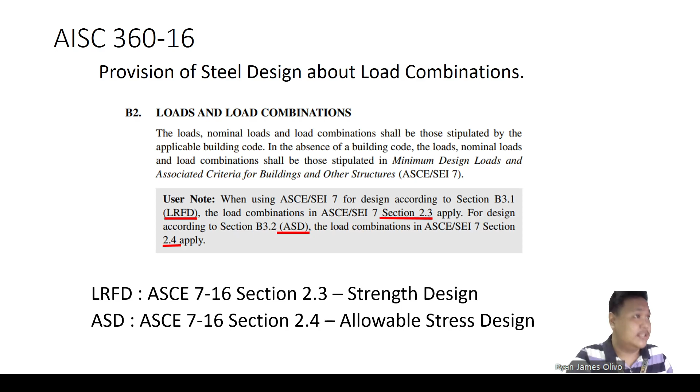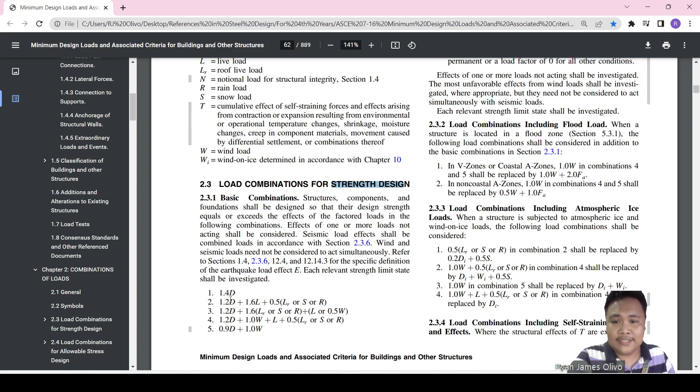So this is what I'm talking about, guys. As you can see, there's no such thing as for steel or for concrete, but this is what we call the load combinations for strength design, and that is 2.3. So for strength design, that is LRFD. As you can see, you're very familiar with this load combination, and for load combination for allowable stress design, this is for ASD.

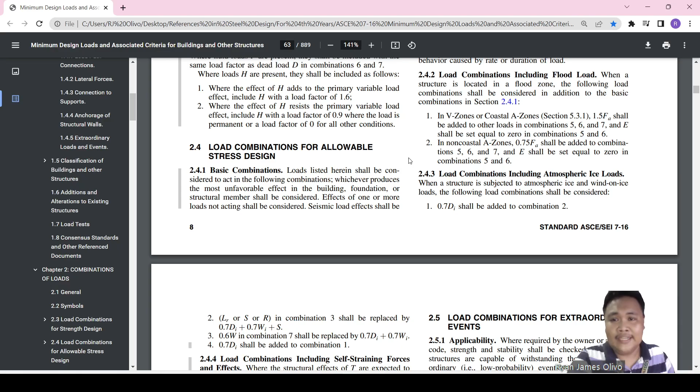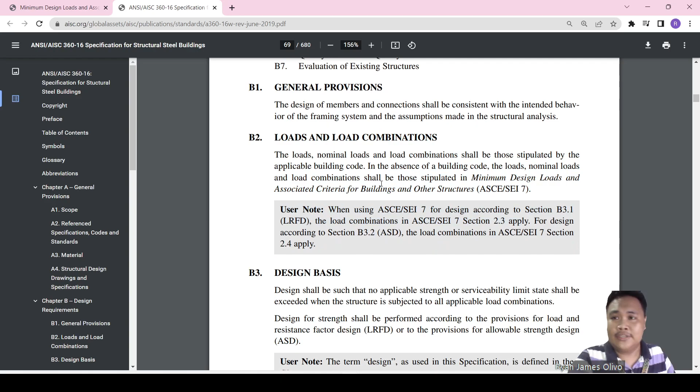Okay, so anyway, this is the specification — this is the load and load combinations. This is AISC, specifications for structural buildings. Let's go back, as you can see here. This is what I'm talking about, guys.

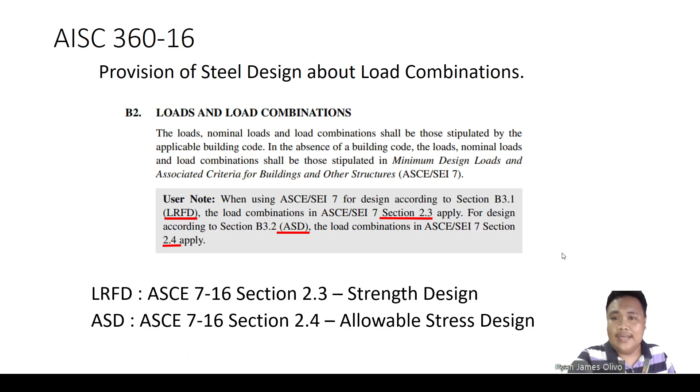As you can see here in section 2.3 and 2.4, both LRFD and ASD say that for wind loading, the most unfavorable effects from wind loads shall be investigated. That is why, as you have seen earlier from the videos, we consider many load cases — almost 8 load cases — because it is from the provision of ASCE, section 2.3 and 2.4, that the most unfavorable effects from wind load must be investigated. So any load combinations and any load cases, we must investigate.

And as you can see, you will never find a load combination that is both wind and earthquake. As you can see here, they need not be considered to act simultaneously with seismic load. So that is the only load combination where you cannot find both wind and earthquake, because it does not really make sense that a typhoon and an earthquake would simultaneously occur on this planet. But we don't know the future — that's the logic behind 'need not be considered to act simultaneously.' Anyway, snow loads and flood loads can act simultaneously with wind.

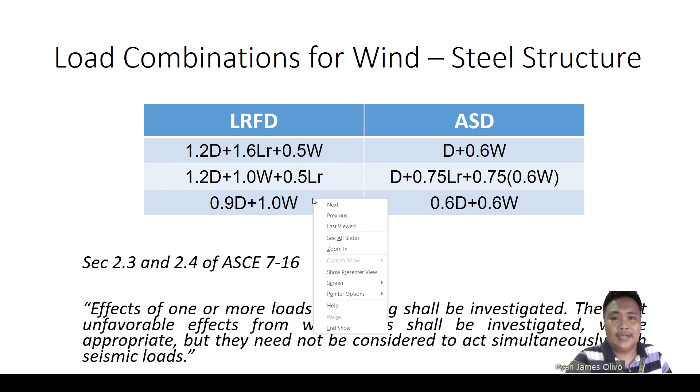And also, snow loads may also act simultaneously with earthquake. Obviously, live load and dead load will also act simultaneously with wind. So in this load combination, I only consider the LR for the roof live load, because in our ETABS example, our live load only comes from the roof. So anyway, let's go here.

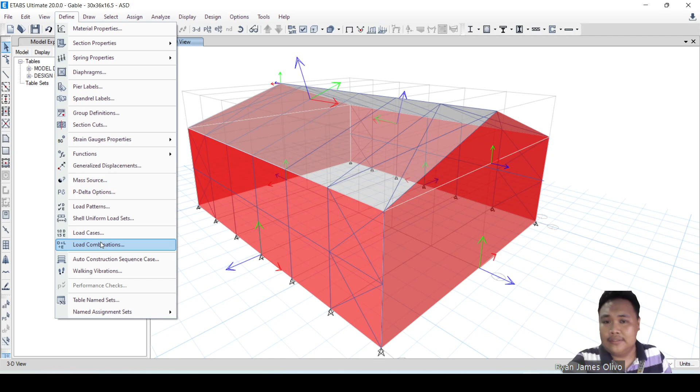So let's try doing load combinations for wind loading. First, let's define the load combination. So this is our load cases — we don't need to double check that because we've already checked it. So load pattern, let's try load combinations. We have shell uniform load sets too, but anyway, let's go to load combination. First, add new combo.

This is LRFD: 1.2D plus 1.6LR plus 0.5 wind. Okay, so let's put some dead load, then live load, then finally... this gives us 8 cases. So it's so many.

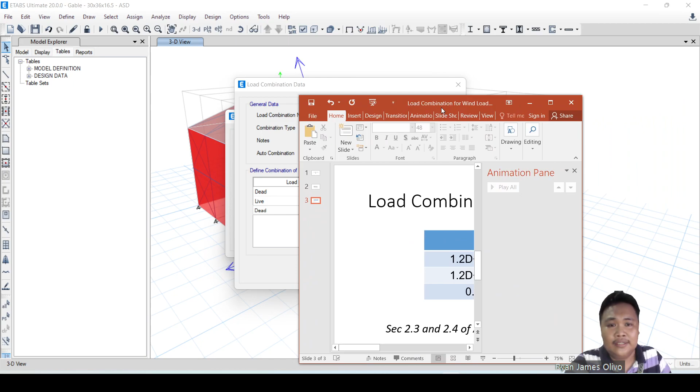So let's try. For the first load combination, this one, you can see here. So next load combination, this one. Anyway, it's so easy, no? So 1.2, 1.2, then this is load combination class, 1.6. And finally for the wind load, let's say WN1.

So let's try putting WN1 plus. Do not use this class without plus, because there's no internal pressure there — use this one instead. So okay, that is for our wind.

Then add new copy, so let's change it to WN1 minus. Okay. Then next, add copy of combo — WN underscore 2, then plus, so WN2 plus. Okay, add copy of new combo, minus — so just change the load name here to WN2 minus.

Then next, add new combo — sorry, let's copy this one. Add copy of combo: WP underscore 1 plus. So you can try to skip this part, you can forward this video, but I'll be doing this one. Okay, so WP1, okay.

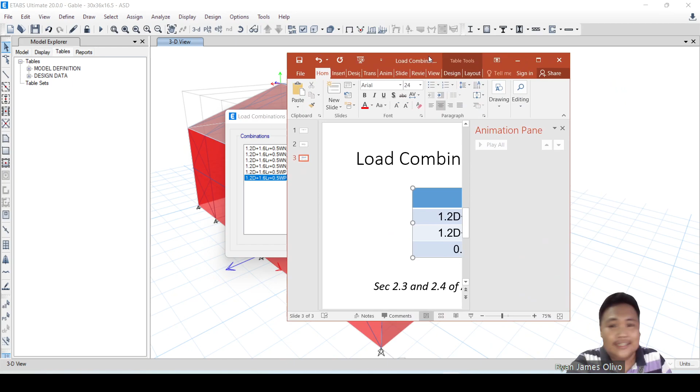Add a copy of combo WP1 minus, this is the negative WP1 minus, okay. The next, so we have so many load cases. Anyway, let's try because this is what's been said - don't forget about section 2.3, the most unfavorable effect. So we try all the scenarios.

So next we copy this one. So number 2. We're now on 2 plus, then it's not really hard because you can just try to check this one minus, minus. Okay, then.

1.0 wind. So this is just 0.5 wind, no? Oh sorry, I forgot, it's 0.5. So almost okay, it's 0.5. I did not see it. So 0.5, okay. 0.5. So double check your combinations class and your factor for this load.

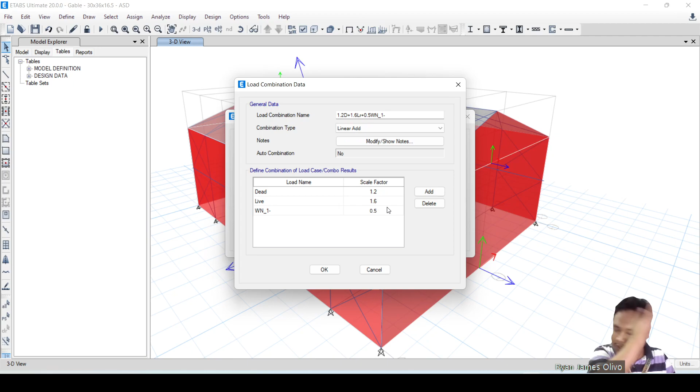It's very obvious that this is 0.5 if we consider dead load and live load 1.2 and 1.6, because as you can see - class, why am I doing this? Why am I doing this, 3? Why am I doing this, 3?

Although this is 1.0 and this is 0.5, because there is what we call overturning moment, and that is very important in the design of what we call the base plate. Since this is a steel structure, we really need to design the base plate. So it's very important that we consider the 0.5 wind and also the 1.0 wind, because sometimes the 0.5 wind will give us a lesser or larger value compared to 1.0, or vice versa, and these things will greatly contribute to the overturning moment or the moment in the design of your base plate.

As you can remember in your principles of steel design, we have different scenarios for design of base plates - that is large moment, small moment, etc. Anyway, that is the important thing here. I hope you get my point of why I am doing this three. I will do this three. So modify, show, okay, double check anything - if this is 3, 4, 5, 6, 7.

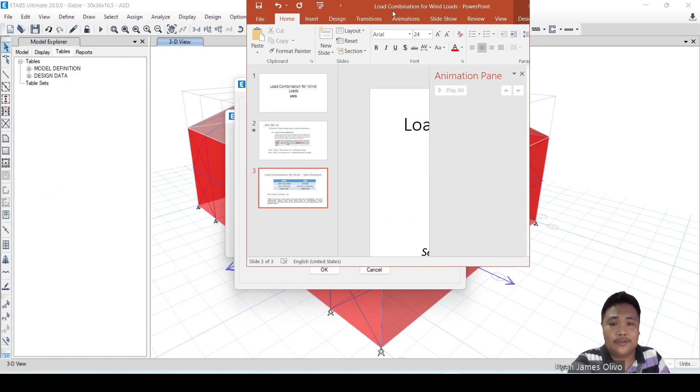Finally, WP underscore 2 positive. WP underscore 2 positive. Then okay, so next, add a new combo. That is our combo again - 1.2D, 1.2D, 1.0W. So let's just finish this one.

So don't be - okay, just be patient - and wind. So let's put wind at the last, 0.5L plus 1.0 wind. WN1 positive. Dead load, 0.5 live load.

Okay, so this is for academic purposes, class, and it's very important that you understand well. So this is 1.0, okay. So let's try to add a copy of wind load now - add a copy of combo. So positive and negative - so this is just negative.

Let's show negative, then add new combo - sorry, add a copy of new combo - 2 positive. 2, WN2 positive. Then add a copy of combo - WN2 negative, so it's just a matter of WN2 negative. Okay, add a copy of new combo WN.

So let's go to WP underscore 1 positive. WP1 positive, okay. So we have - add a copy of combo. So this is just very easy, class, because it's just repeating, no? WP1 negative. Okay, P1, N2, N3. So WP.

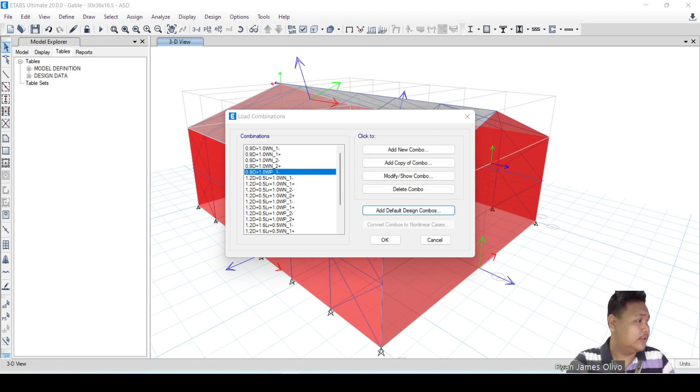So I'm recording for almost 14 minutes. Okay, let's go back here. So 1, 2, 3, 4. Add a copy of combo - 2 plus.

So, 1, 2, 3, 4, 5, 6. Sorry, 1, 2, 3, 4, 5. So I don't have... 1. So, okay.

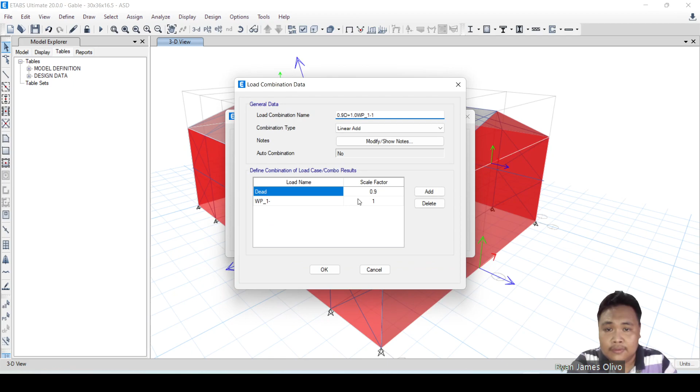Okay, and finally this one, add a copy of combo, plus. So we can review this one: modify show copy, WN1, okay. Modify show copy, WN1 plus, WN2 minus, WN2 plus, WP1 minus, okay. WP1 plus, WP2 minus. Okay, 1, 2...

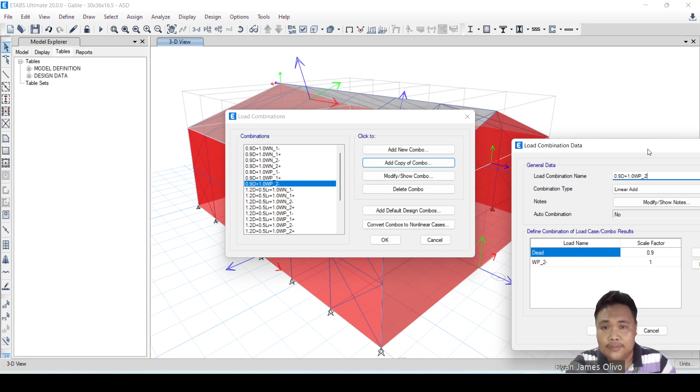1, 2, 3, 4, 5, 6, 7. So we don't have WP, WP2. Okay, we don't have WP2 minus. So add a copy of combo WP2. What don't we have? WP2 plus. Oh sorry, we don't have WP2 plus.

1, 2, 3, 4, 5, 6, 7, 8, 9, 10, 11, 12, 13. So we have, all in all, 24.

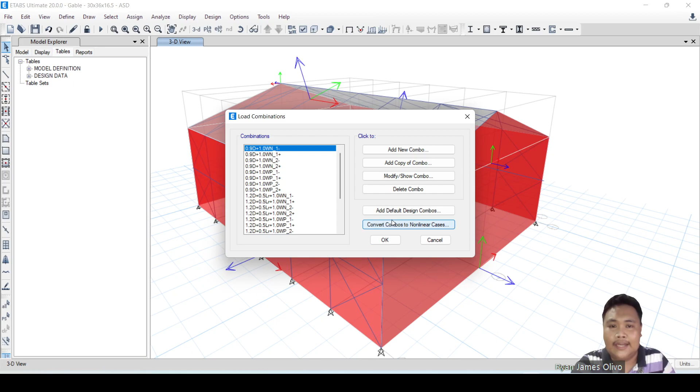I can also add default design combos, but it does not give me this, and I can't even rename them. Well, I can rename them, but it's much better to manually type this one. And if you add default design combos, it will also add the WN, in which there is no internal pressure, but there is always an internal pressure if it's enclosed or partially enclosed. Okay.

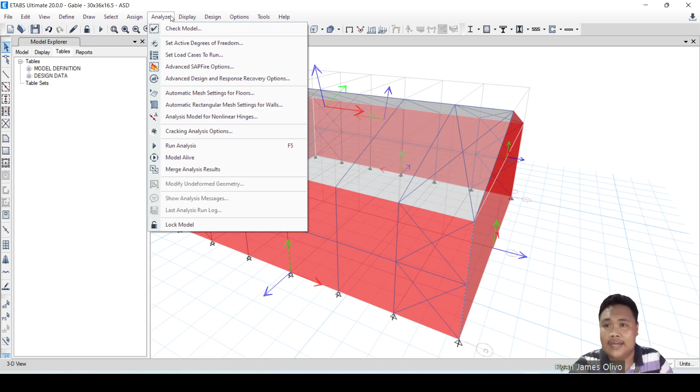So now since everything is complete, we can try to run. So I have run this one, so it will run. Sorry, no — let's try checking first the analyze menu for what load cases we could run. So let's run all.

Mm, I don't think we need to run this. Run, do not run case; run, do not run case; and also this one. I don't think we need to run this one — only the load cases. Okay, run, do not run case. So we don't need to run that, so we only need to run this one.

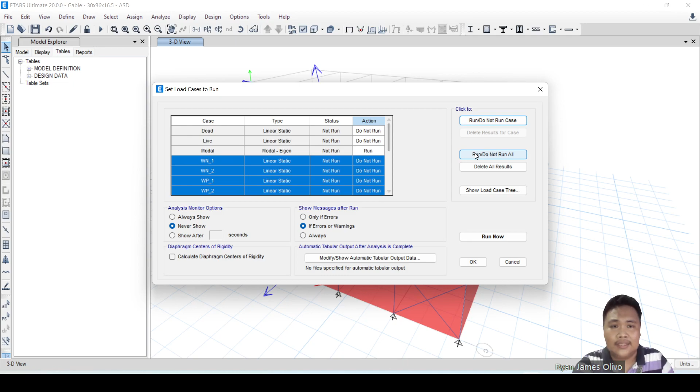Let's try to run all. It doesn't even matter because the analysis is fast and this is just linear, so we just need to run all. As you can see, we have run.

So this is dead, this is dead. We're not concerned with dead.

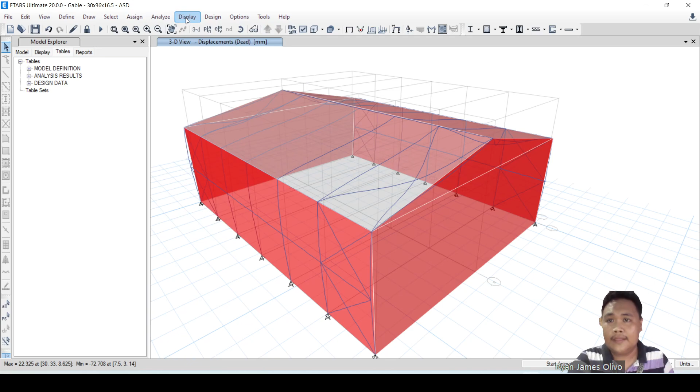Now let's try removing the display — sorry, select, I'll just remove the cladding. Okay, object type that is both floors and walls. Okay, close. Select, then close, then hide selected objects.

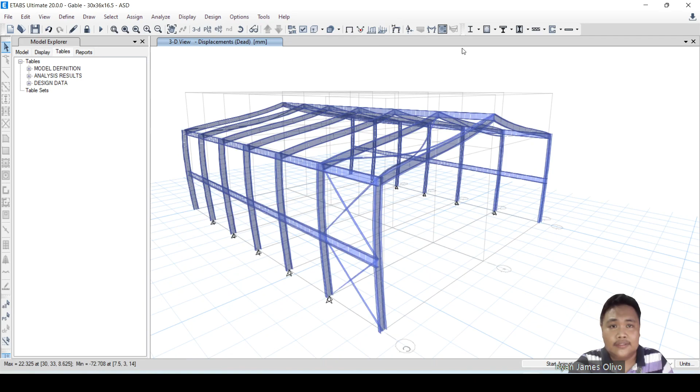Okay, so this is... let's try — no, so let's try first seeing the cases of combination. So first the combo here. Let's see the shear and moment.

As you can see, point 0.9 gives us great load, 687 kilonewton. Okay, for the next part we have this one.

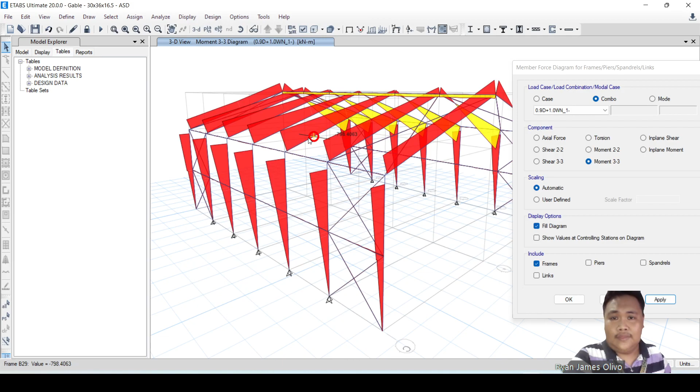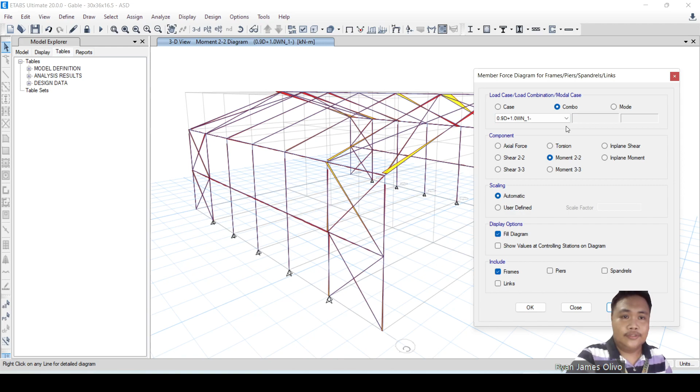So guys, this is not my job, this is your job to find which is the largest. So for the shear, so for the moment, this is what you will do — that is moment 3 for the x. If you consider moment 2, it will give us the moment for the y direction, but you can still see that, no? But anyway, it's moment 3.

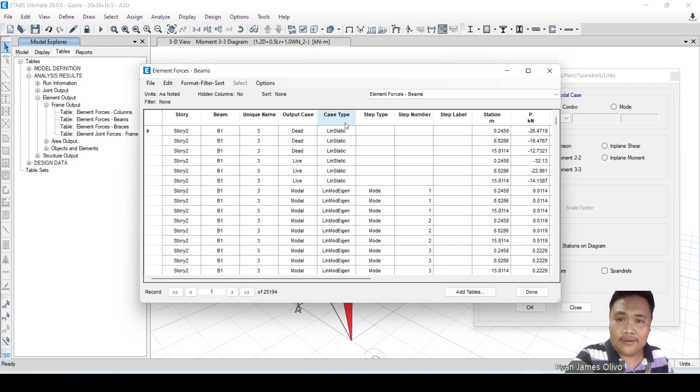So guys, you try to find the largest one here, and you can also do that in this analysis result. Then: element output, frame output, element forces, beams, columns. So let's try beam — as you can see here, you can find all the load cases. So for these load cases, you can find the maximum, no? Just find the maximum. So let's try finding the maximum here for load case point 0.9, okay.

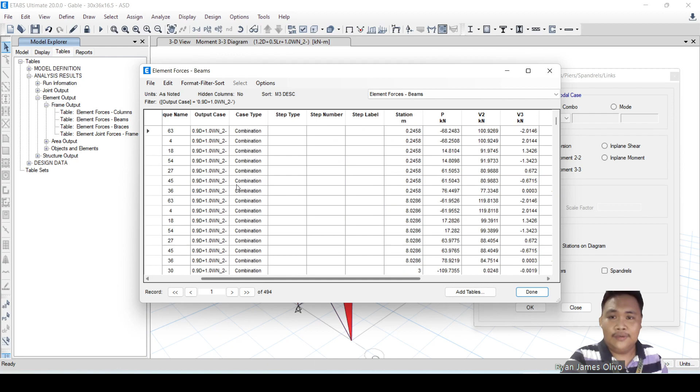So it's up to you guys to find this one. So, sort ascending, descending. Okay, so it's 1,573 for this load combination. Then for this load combination, it's just 1,941. Okay, for this load combination, it's 1,592. So it's up to you in finding it, guys — this is your job.

Then anyway, that is for the shear, M3 — moment M3. So for the shear, that is V2. So consider V2, don't consider V3. So consider M3, then we have the axial load.

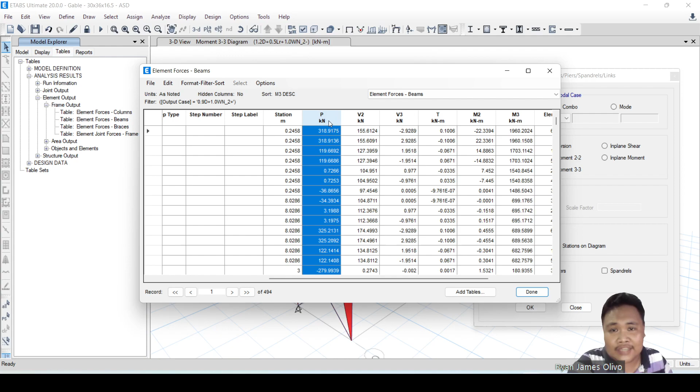So for axial load, it will give us, sort descending, 627. Okay, you can find that for the beam, for the column. So it's your job, guys, no?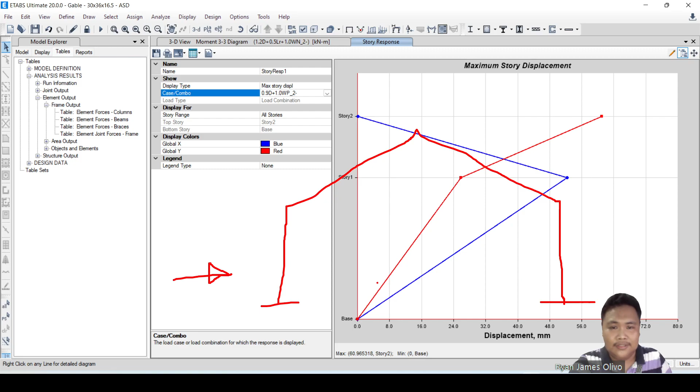Why? Because as you can see, we have the x direction, the normal to the ridge. As you can see, we have a frame that is so large, no? The span is so large, it is almost 30, no?

That is why there is so big displacement. So it's up to you to put some bracing, or decide where you can put some bracing, no? Anyway, that's not our job here, the job here is for wind loading.

So WP plus 2 plus. Let's check for the 1.2D plus minus 0.5 LR. So we have 732 plus. It's up to you guys to find the maximum here. Okay, so the maximum is almost 900.

Let's try finding the maximum. So anyway, if you want to find it in the show table, you can try, no?

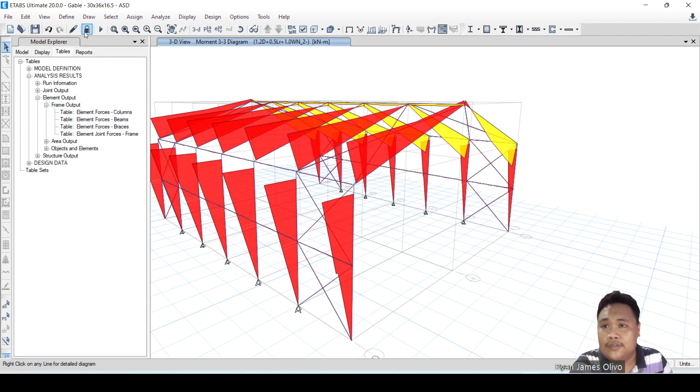But I'm saying to you, we can also find the envelope, no? So let's try enveloping all loads. Let's try, no, so that we can find it.

So define load cases or load combinations, then add new combo, then we try envelope. So it's not really...

...advisable to add this, but let's try, because enveloping means it will find the largest loading for all the load combinations.

So for all the load combinations, that is 4, 5, 1, 2, 3, 5, 6, 1, 2, 3, 4, 5, 6,

7, 1, 2, 3, 7, 2 minus 8, 1.

So you do this, class, so that you can find the largest, no? This is what we call the load combination envelope. So 1 plus 2, 2.

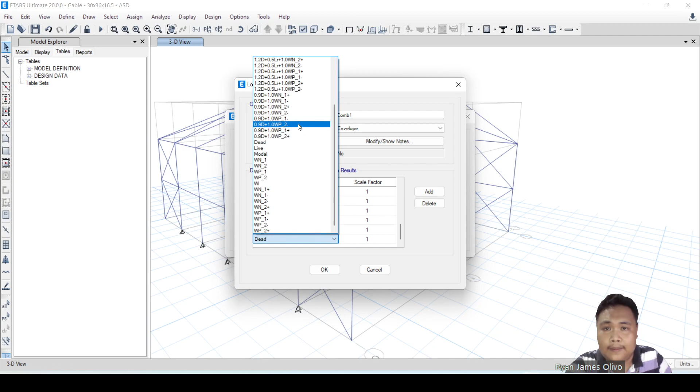So this will help you find the maximum, no? Anyway, you can also try... P2.

Okay, so we call this the envelope, all loads envelope, all wind combos.

So we also need to try, no, combo wind.

This is what we call 1.2D, 1.6, 0.5. 1.2D plus 1.6 LR plus 0.5 W. So this is for all, 1.2D, so we can find...

So it's just a matter of doing these things, class, no, because this is just easy, and this is very important because...

...this is what we need in designing. Okay, so...

1, 2, 3, 4, 5, 6, 7, 8. So okay, okay.

So next, add new combo. So modify, show... sorry, I didn't mean to, why envelope only? So don't forget, class, it's envelope, not linear add. If it's envelope, let me edit this one, envelope.

Envelope. Don't do the combo add. Don't do the linear add. So it's envelope add. Okay.

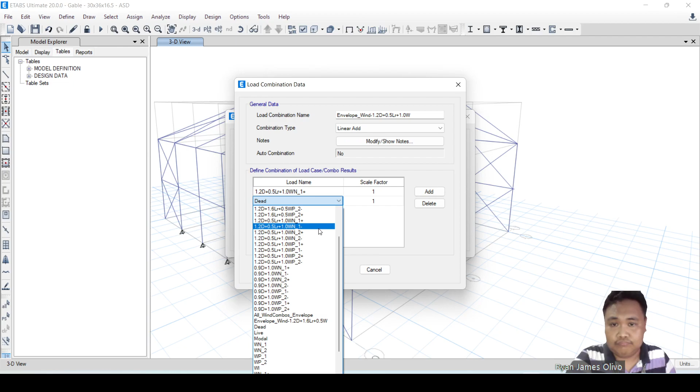So this is for academic purposes, class, but it's still your judgment, no? But if you want to be really sure about your loading, especially this wind load, because you can see wind...

...loads are very important, especially in the Philippines, because we are under... this is a region, no, this is a typhoon hit region.

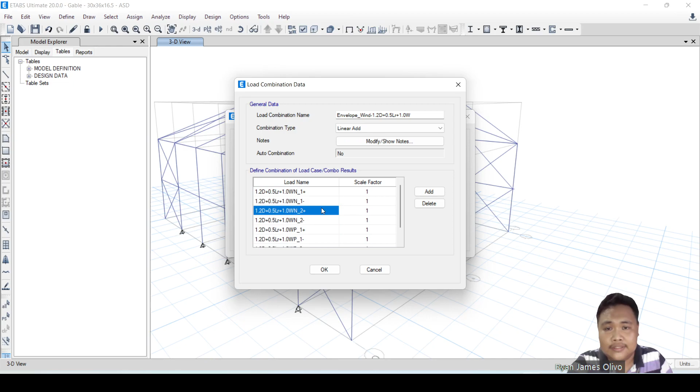4, 5, 6, 7, 8. So finally, the last envelope. Okay, I forgot, so let me change it to envelope. Okay, so let's try modify envelope.

Okay, envelope means finding the largest of all the different combos. But unfortunately, do not use this when you are using the auto design of steel, because in auto design of steel it will generate the most automatically.

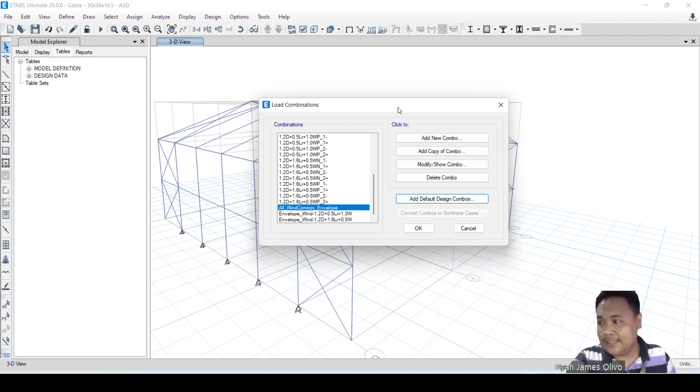But for this sake, for demonstration purposes, I will try to show you how to use the manual AISC manual. After we get the shear and moment diagram, we need to manually find the largest among all of these combinations.

So anyway, you will get my point later, for the future videos about steel structures, no.

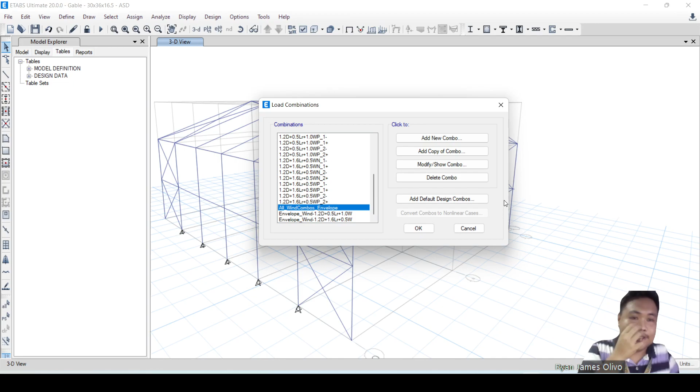Add copy, add new combo. So our next combo is 0.9D, 0.9D plus 1.0 WN. Okay, that's W. So this is add.

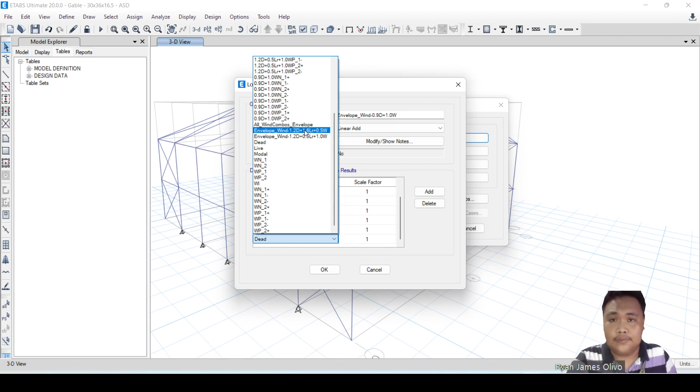Okay, so anyway, for the sake of this tutorial, this is very important. So, 1, 2, 3, 4. Okay, then we all have this envelope.

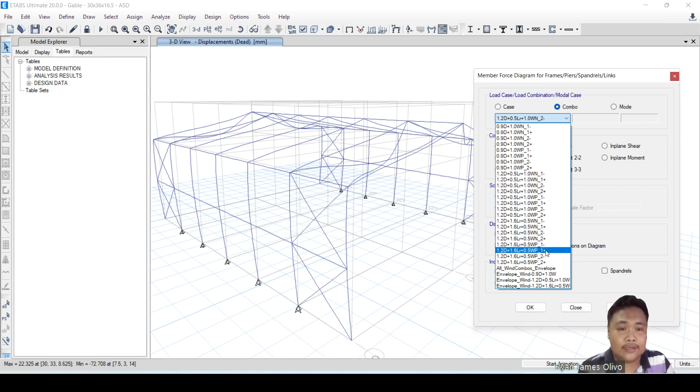So let's try running this. It will find most of all, no. So first let's consider this one, and we find the combo, all wind combo. So this is the answer. Our wind combo, the maximum here is 946 and the minimum is negative 1474.

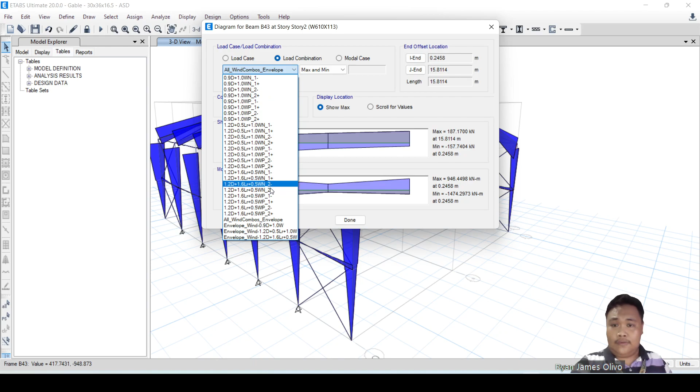I don't know if this is really it, no, but this is the envelope shown for envelope wind. Okay, it's so large, 5329. So I really don't know how to use this envelope combos, no. Why is it this is very big? Maybe, sorry, I forgot, that is not envelope. So always double check this combo, ha. Always double check this one.

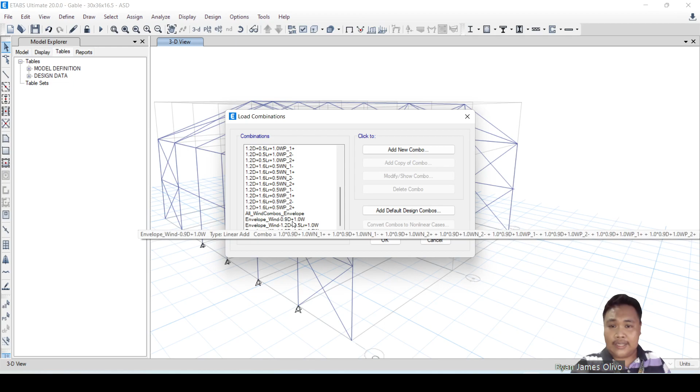And do not use this linear add. This is wrong, this is wrong linear add. Okay, so let's check before you run your simulation. It must be envelope, because linear add is adding all. That is why it gives us 5,000 plus, no? It gives us a very large loading because it adds. So envelope only, use envelope.

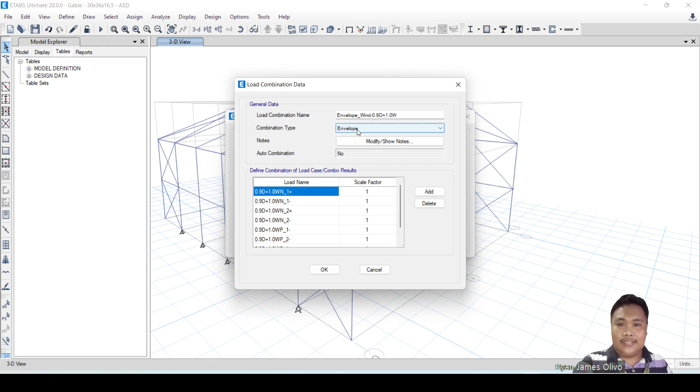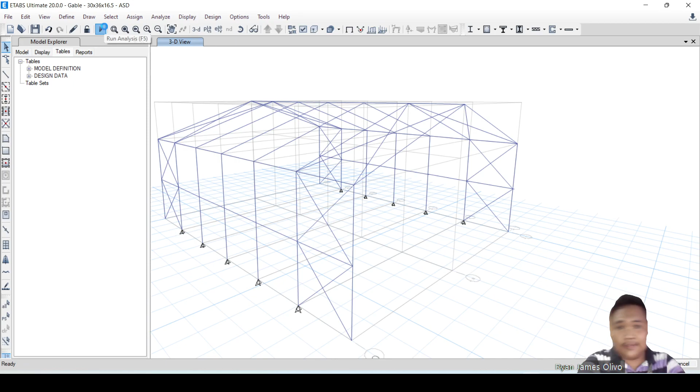So let's check this. This is envelope, okay. This is envelope, okay. This is envelope, okay. Okay, all envelope except this one. These are linear add, okay. So anyway, okay, then let's run. Fortunately, we have a very fast analysis of this one because this is just a linear loading.

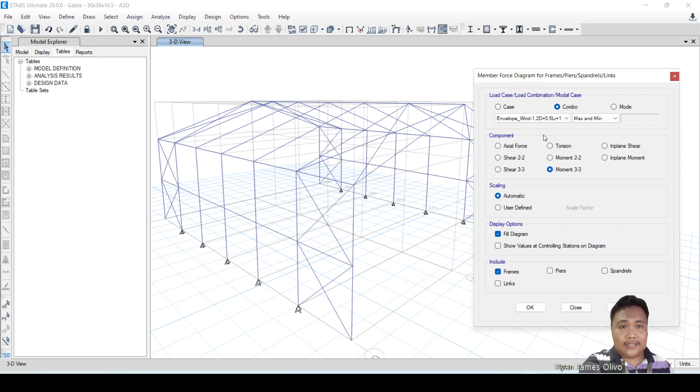Okay, let's go here. Combo. Okay, no, don't, not the deformed shape, the shear and moment diagram. Okay, the moment diagram, we have this. Let's try this one. Okay, apply.

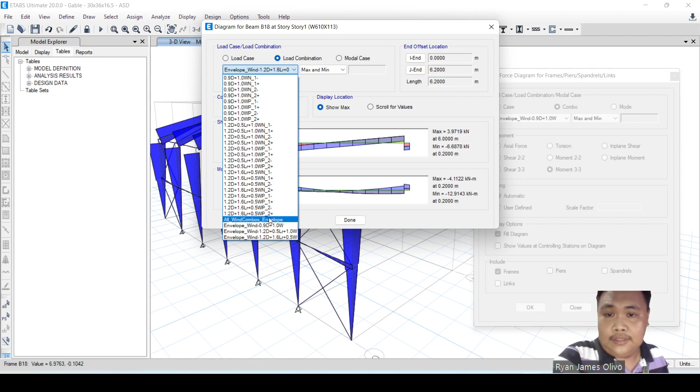So the maximum here is just, okay, it's this. Why is it that it's so little? So anyway, this is the envelope wind, no. Okay, this one will give us also a very small value, but all wind combos, okay.

I clicked the wrong one. I clicked this one, sorry. So I clicked the... obviously there is no loading here, but only axial force. No, try, okay. So you can see we have axial force here. As you can see, the axial force is 568.

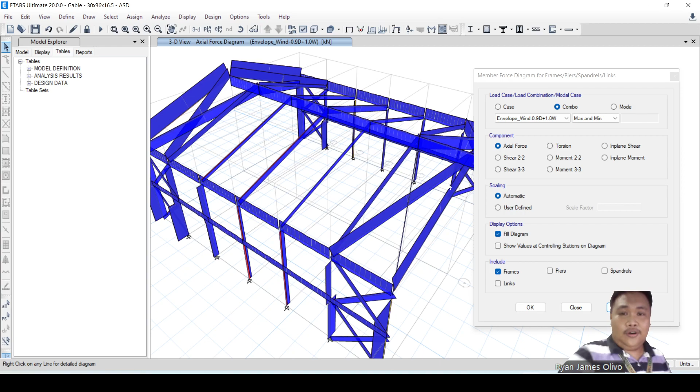So class, when dealing with moments, mostly the braces, the loading in braces will be mostly axial. As you see, this one is axial load, no? Braces will carry axial load, axial forces, while bending forces will be carried mostly by the, what we call that, this beam or this girder, this gable frame.

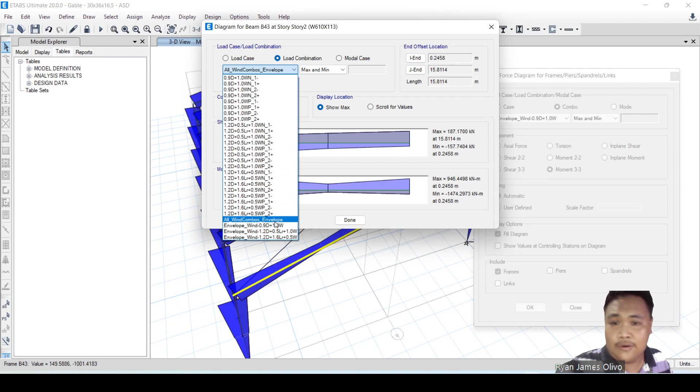So you can see the maximum envelope here is negative 1,528. And for this one, that is 1,474, 1,186. So overall, wind combos envelope, we have this one. So as you can see guys, negative 1,528 for the minimum. So let's consider this one.

So you can put it at 1,500 kilonewton for this part, no. But fortunately, this one has much littler value. Okay, so you got my point there, no?

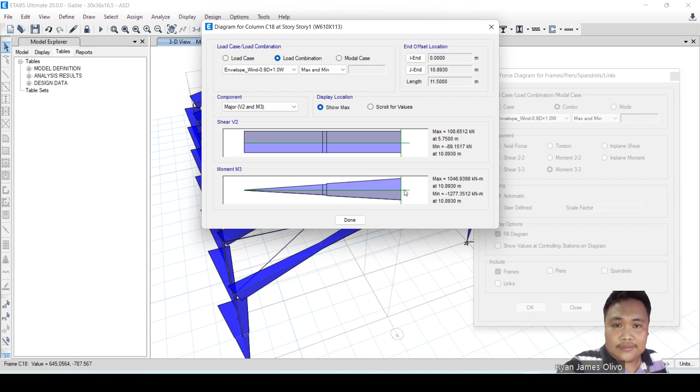Okay, so for display story response plots, let's try the envelope. So it's 957 for all wind combos. That is for Global X.

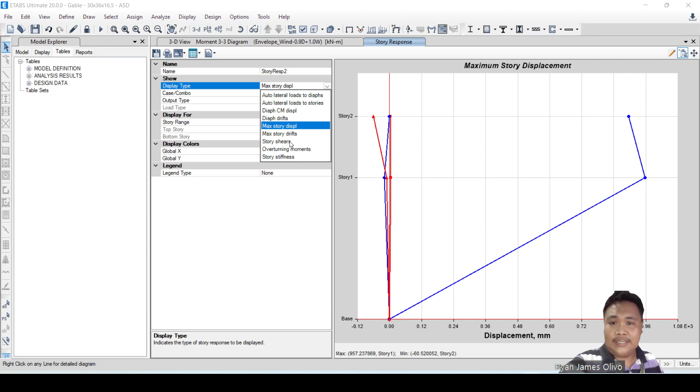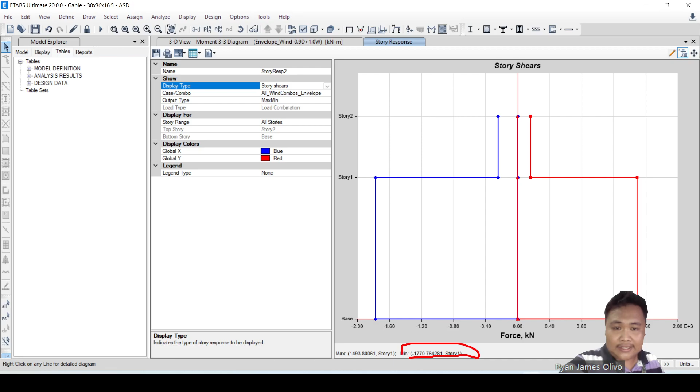For the shear, maximum story shears, so that is 1,493 kilonewton and 1,770. So take it, this one, 1,770. This is our shear.

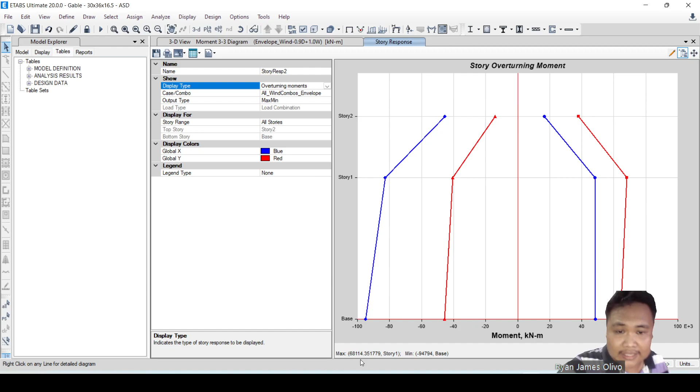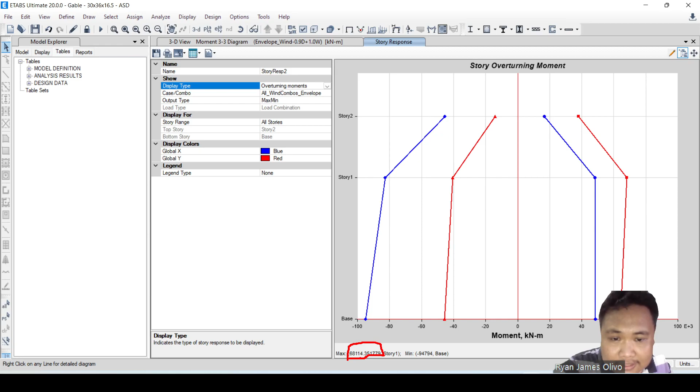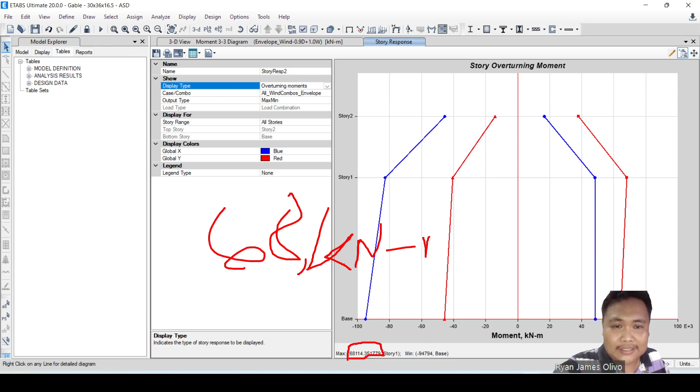And for our overturning moments, we have 68,000, 681,000. So as you can see, it's so big, 68,000 kilonewton meter. So this is what it'll yield, no? 6,800, no, 68,000, sorry, 68,000. So over 68K. Don't worry that it's very big because it's really big, 68,000 kilonewton. And we have 94,000. It's not 681, it's 68,000. So it's really big. Overturning moments for structures is really big, guys.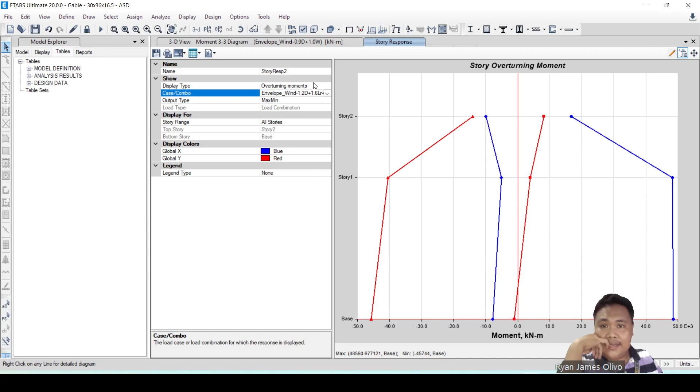So let's try the max. Okay, MaxMin for all load combinations, this one. So we have greater than that. So you can check it. Okay, story shears, okay.

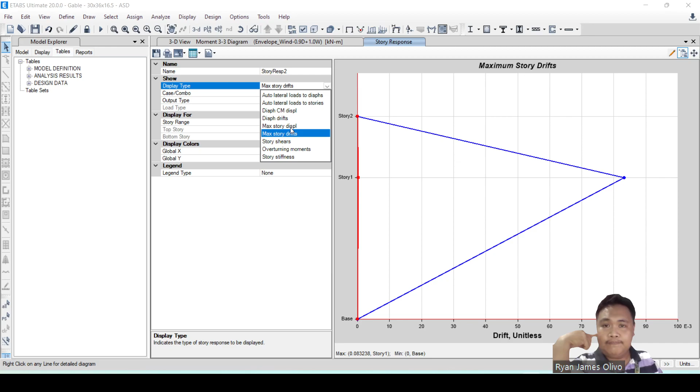As you can see, for the drifts we have 4%. So 4% is, I think, it passed. 8% is still good, so story drift is still good. But the problem is the story displacement, so big, 915, almost 1 meter displacement. Anyway, that's the thing.

So what? So our loading here is 1,323 for the eave height. So this is eave height, no? So this is eave height. Okay, let's try the envelope.

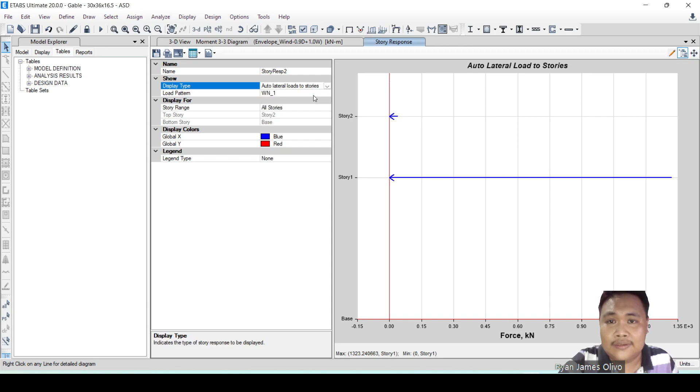Okay, it's lateral load, so it does not matter. Auto lateral, don't use this class, this is wrong. Okay, just use this story shears. So the story shear here is 1,493 and this one is 1,770. Okay, this one is 159.

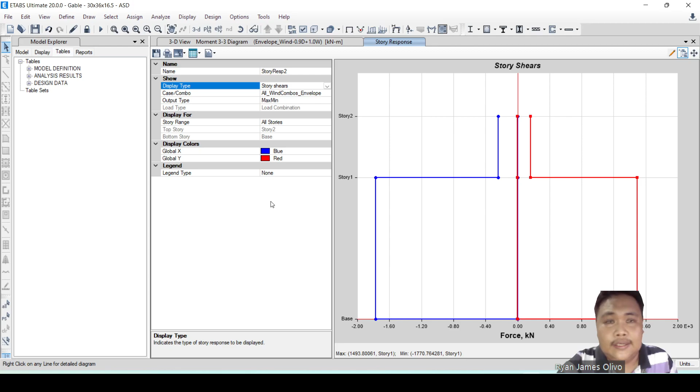Okay, I think that's it. So this is our ano. Okay, so this is the point. After inputting wind load, we try to do checking them all in all because, as you can see, this is what the unfavorable effects of wind load. We need to investigate the most unfavorable. This is from ASCE. So our topic is wind loading.